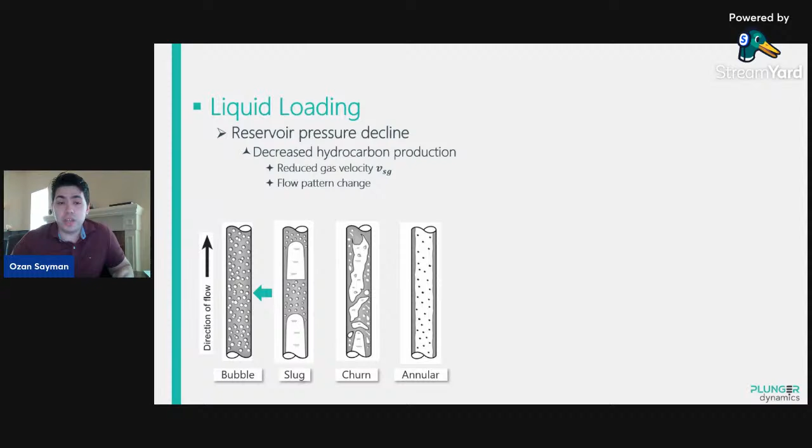So let's talk about liquid loading. As reservoir pressure declines, your hydrocarbon production is going to decline. The gas velocity is going to be reduced over time, and your flow pattern is going to change from annular flow to churn flow and then slug flow, and you're going to see liquid loading.

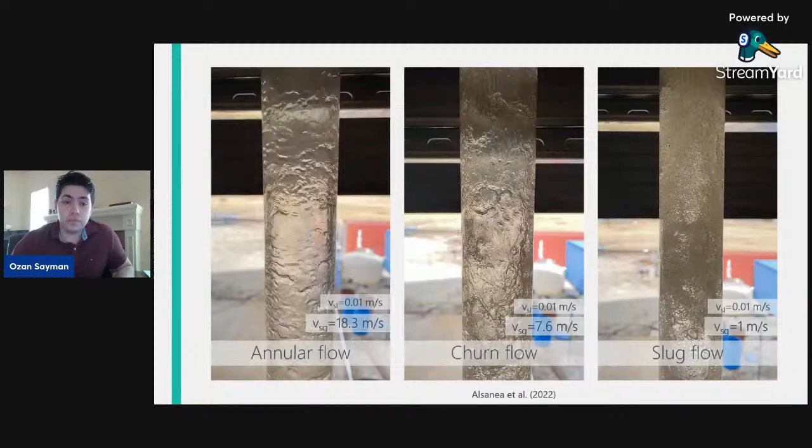Let's describe the flow patterns with different videos. So on the left, you have annular flow. You can see this is a high gas velocity situation with 18.3 meters per second of superficial gas velocity. In this case, you can see the film going up, and in the core of the flow, the gas and some liquid droplets going up.

In the next one, you can see a churn flow example. In this example, you can see the liquid film - some parts of the liquid film are falling and some parts are going up. There's a stagnant liquid film, and this is called churn flow.

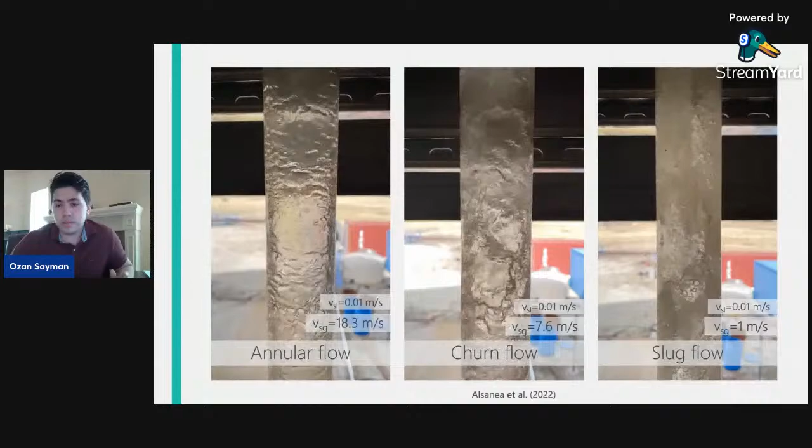At a reduced superficial gas velocity of 1 meter per second, we are going to observe slug flow. This is shown in the right video. As you can see, the slug is going to go up, but as slugs pass, then the liquid film is going to fall down.

So as reservoir inflow decreases, the production is eventually going to die because liquid loading is going to occur. So the flow pattern is going to change, and then you're going to see the slug flow, and the loading is going to kill the production.

Basically, liquid loading is happening due to insufficient gas velocity. The gas is not enough to basically have the liquid droplets going up.

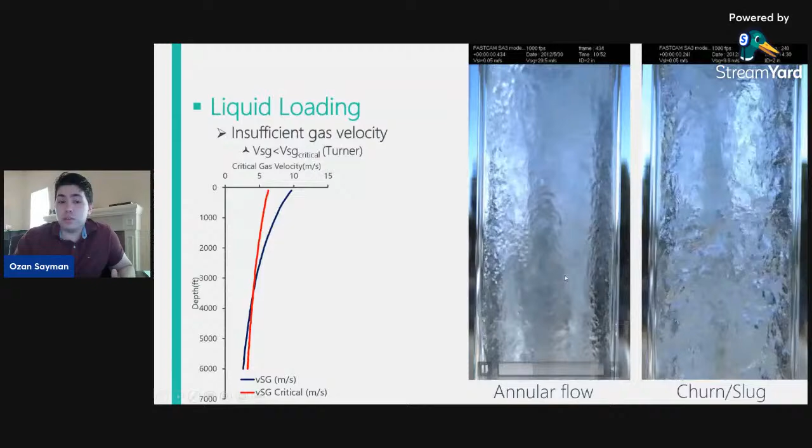But in the bottom parts, this gas velocity declines. So instead of annular flow, you probably see churn or slug flow, and the liquid loading starts to occur here. So how to avoid this? There's artificial lift methods. You can use different pumps, which can increase your reservoir inflow and production rates, or you can try to reduce hydrostatic pressure. Plunger lift, gas lift, and foam lift are good examples for that.

Let's talk about where liquid loading happens. Liquid loading is known to be happening in gas wells, but it's also happening in unconventional plays. So this is not related to just gas wells. There could be wells producing high amounts of oil and still having liquid loading issues.

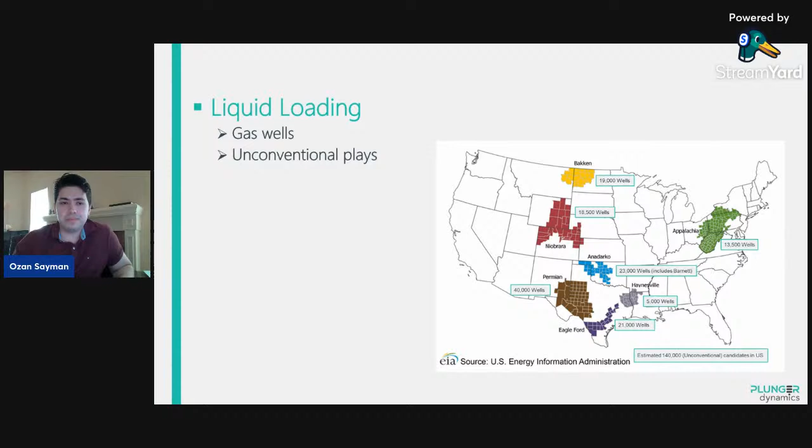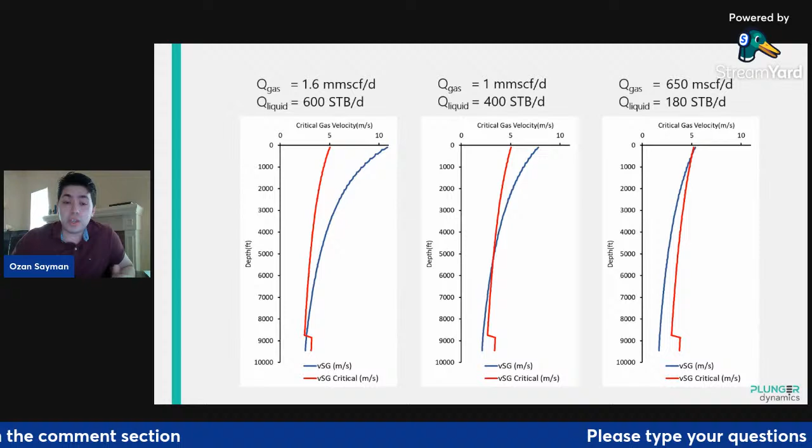So I did 3 different multi-phase flow simulations. This is a well schematic and fluid properties taken from the Midland Basin. For 3 different production rates, I plotted how critical gas velocity and actual gas velocity in the well behave. The actual gas velocity is the dark blue one. At 1.6 million cubic feet, we don't expect liquid loading. However, as we go to lower production rates, you might be producing 400 barrels of water and oil and 1 million cubic feet of gas. At some point, we start to have a liquid loading issue.

As you go to reduced gas production rates, you are going to have more and more severe liquid loading cases. So in those cases, you either need some gas lift to increase the gas velocity, or you need to use plunger lift. So this is not actually just for gas wells. It's also happening for wells producing more oil and more water than a typical gas well.

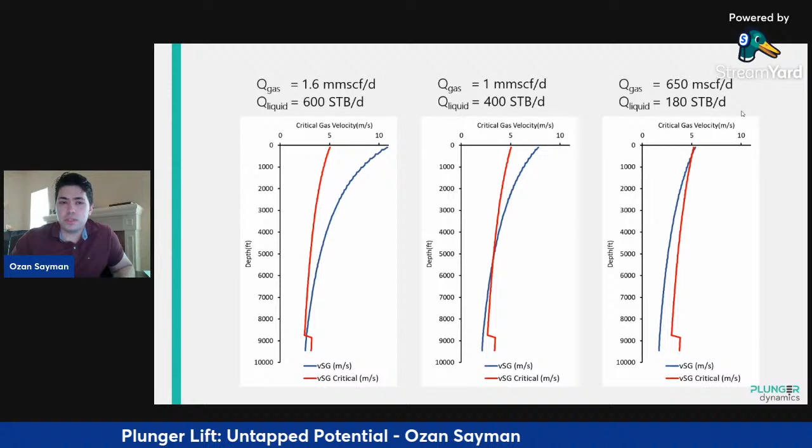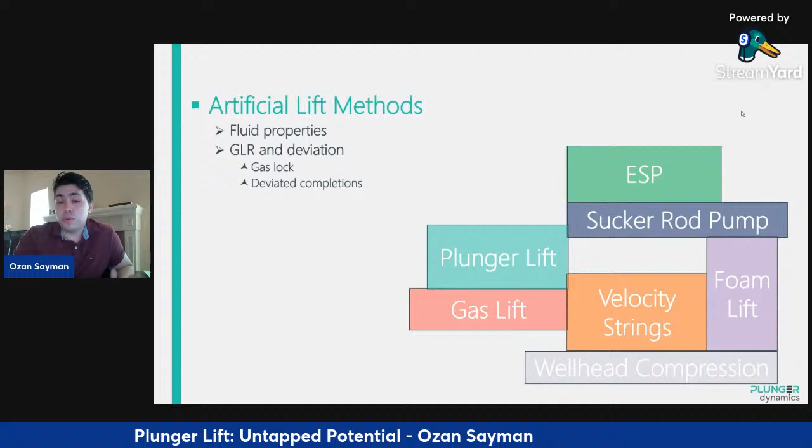Let's look at some of the major artificial lift methods, and which is going to be a solution for liquid loading. For fluid properties happening in unconventional plays and gas wells, the PCP and jet pump are not the best options. For higher gas-liquid ratios, gas lock can happen. For deviated completions, you might not be able to use sucker rod pumps and ESPs. Moreover, some methods like foam lift and velocity strings only work for short periods. Foam lift is basically dependent on the chemical composition, so they are also not the best options for wells having liquid loading issues.

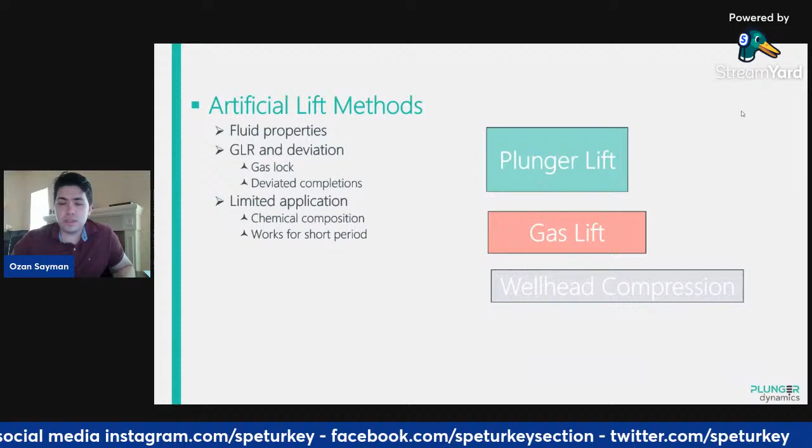So plunger lift, gas lift, and wellhead compression are the best options to tackle the liquid loading problem. We are going to focus on plunger lift. In the unconventional plays, it typically starts to be deployed after 6 months. In some cases, they just start with plunger and gas lift together from day one.

With plunger lift, you can increase your production rate. You can help mitigate paraffin issues, and you can cut lift expenditure. Instead of injecting more gas, you can inject less gas, maybe you can remove the compressor. So it's a much more cost-effective method compared to others.

Let's look at a typical gas production decline curve. Let's say this is a gas well and it's declining, shown by this decline curve. With liquid loading starting, we are going to see erratic production, and the average production per day is going to reduce, and you're not going to be able to continue with the gas well decline curve.

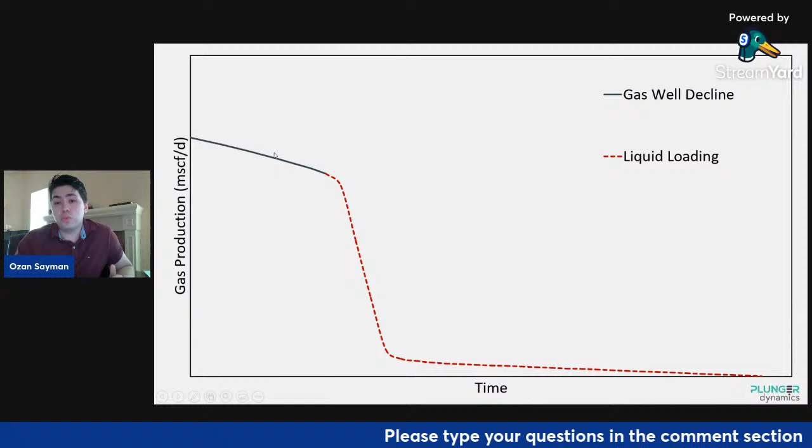However, if you install a plunger here, you are going to tackle the liquid loading problem, and you are going to be able to have a similar decline curve to what you expected before the liquid loading stage. So between that is your cumulative production increase due to plunger lift.

Okay, let's talk about how plunger lift works. What is a plunger? A plunger is basically a metal cylinder. We are creating a sealing between the gas and liquid phases in the well. With this metal cylinder, we are just using the reservoir energy.

I'll start with the conventional plunger lift, which is a type of intermittent production. In this case, we start with our well shut in. Let's check the animation. Our well is shut in, and there is no production right now.

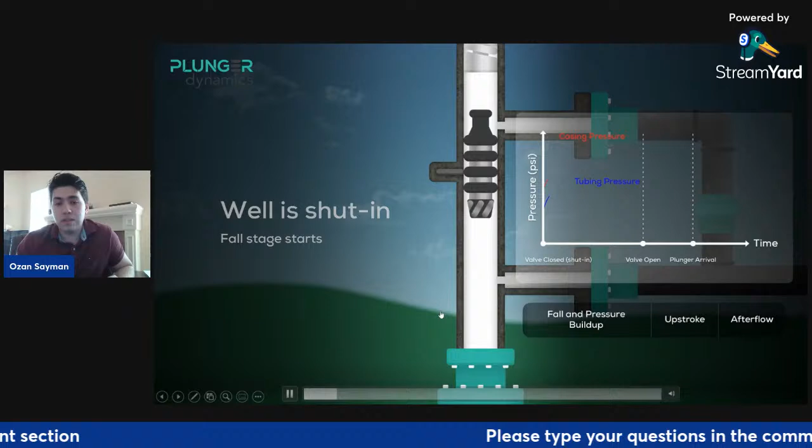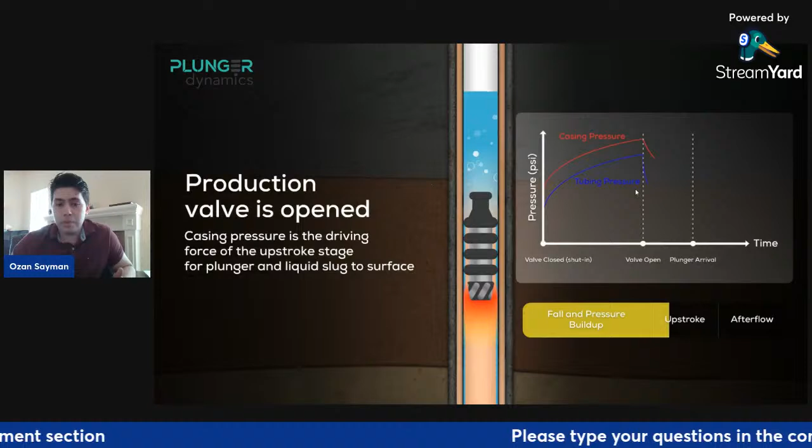The plunger falls against the static gas and liquid column. Pressure builds up because we shut our well in. Then as we open the production valve, the plunger goes up and removes the liquid loading that happened in the bottom hole parts. With that travel, with that cycle, we're able to remove that liquid loading. Doing these cycles continuously helps us get all that liquid loading out, and our production doesn't die, because we're removing hydrostatic pressure with each plunger cycle.

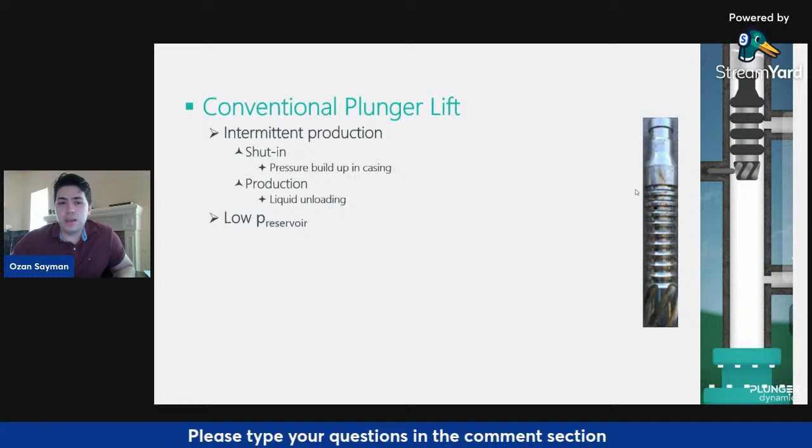So basically, this is an intermittent production method. When we shut the well in, we build up pressure in the casing. When we open the production valve, we unload the liquid. This method is typically used for marginal wells, when the reservoir pressure declines a lot, when you need very high gas injection rates. Instead of that, you go for the conventional plunger lift, and you're able to unload that liquid accumulated in the bottom hole. We have 3 stages in this.

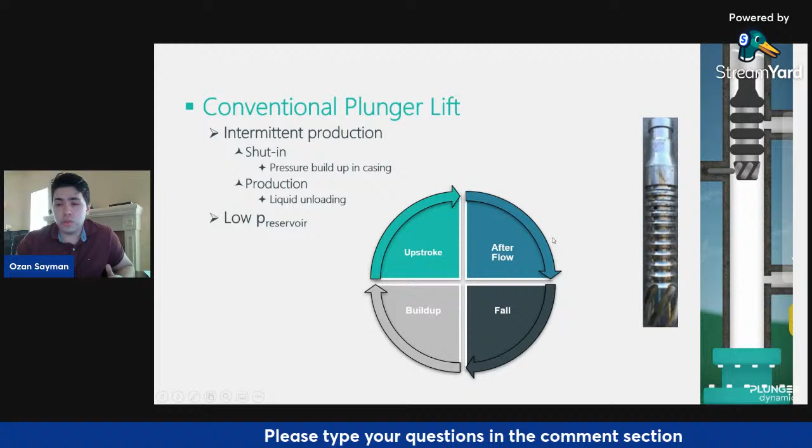When we shut the well, the plunger falls and pressure builds up. As we open the production valve, the plunger upstroke happens - this is the upstroke stage. Then we produce this liquid load, and at this stage we leave our plunger at the top in the lubricator. This stage is called afterflow, so we let the well produce by itself until the liquid loading starts again.

In the plunger lift area, there are poor optimization techniques used. Most people use rules of thumb - there's not too much physics put into these plunger lift operations, which well to use, or plunger type selection. So we are trying to eliminate that with our research and other works on plunger dynamics.

Let's move on to continuous flow plunger lift. This is a different method - we don't need to shut the well in. This method has little to no shut-in time. Shut-in times could be just 1 minute to let the plunger fall from the lubricator, but in general you can consider this continuous production without any shut-in time. We have 2 different continuous flow plunger lift types: bypass plunger and 2-piece plungers.

This is an example of a 2-piece plunger. We have a sleeve - basically a hollow metal cylinder, the inside is empty - and we have a ball. We let the ball fall first, and then we let the sleeve fall on top of it. When they merge together at the bottom hole, they go up together and sweep the liquid.

This is my experimental facility from University of Tulsa. Here we were able to have multiphase flow conditions. We have the liquid phase shown with red dye color, and we also have gas injection in this case. Let's start the video.

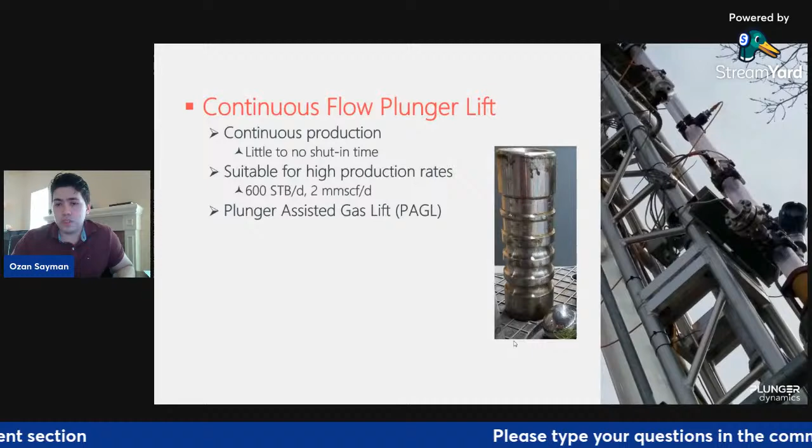In the start of the video, we have the ball in the bottom part, and the sleeve is going to fall. You can see the churning flow. The sleeve is falling, and it merges with the ball and goes up, sweeping the liquid, basically reducing the hydrostatic pressure in the well. This method is suitable for high production rates - it can go up to 600 barrels per day and 2 million cubic feet of gas. When used with gas injection, this is called plunger assisted gas lift, PAGL.

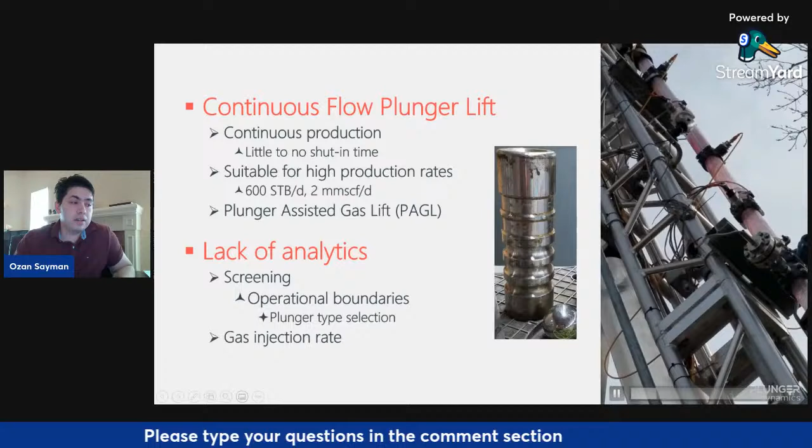We have only 2 stages in this case - the fall and the upstroke. We still have a lack of analytics happening for this. The screening of which wells to use this method on is not great. In terms of operational boundaries and plunger type selection, there is room to grow, and operators are always looking to optimize the gas injection rates on those plunger assisted gas lift applications.

Continuous flow is basically continuous production, but conventional plunger lift is an intermittent production type. You might be shutting your wells in for hours, then sending the plunger up and producing that liquid, with an afterflow time of maybe 10 or 20 minutes. Basically this is intermittent production - you are not going to have production on time all day.

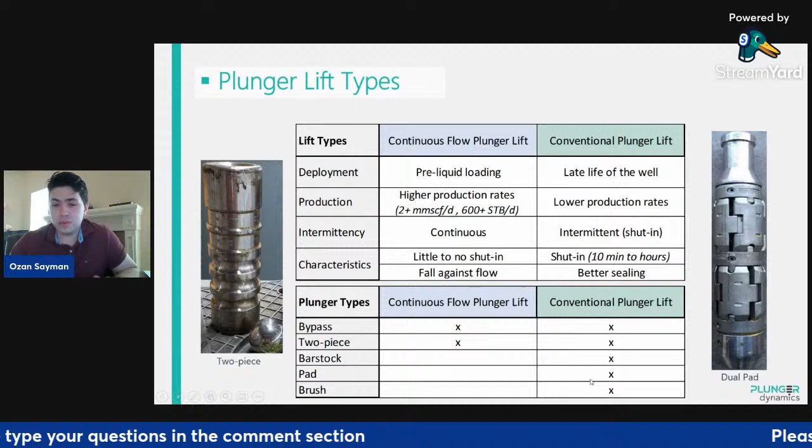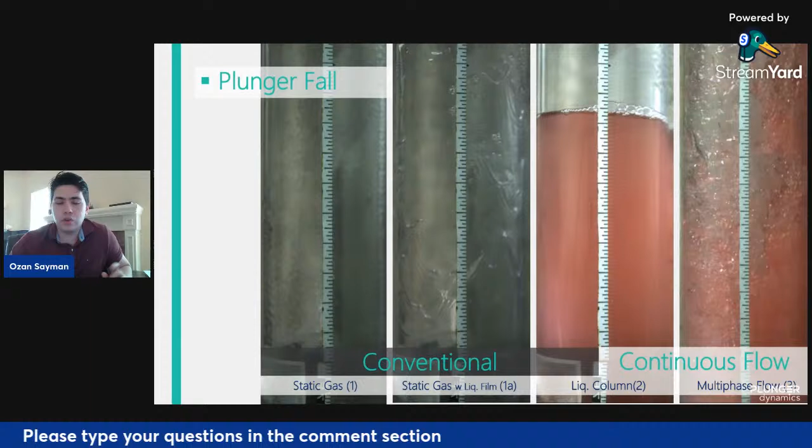So conventional plungers fall against basically static gas or a static liquid column. In the liquid column, its fall velocity is reduced a lot more. The continuous flow plunger basically falls against multiphase flow. On the right, you can see the multiphase flow environment - there's two-phase flow here, and the sleeve, the hollow cylinder, is falling against the multiphase flow.

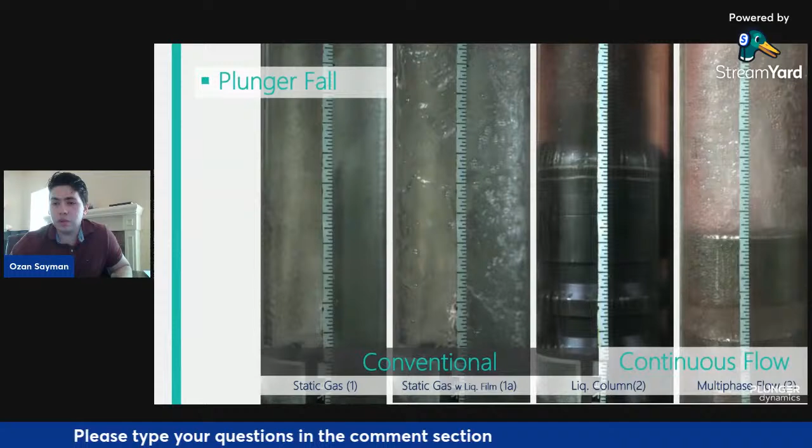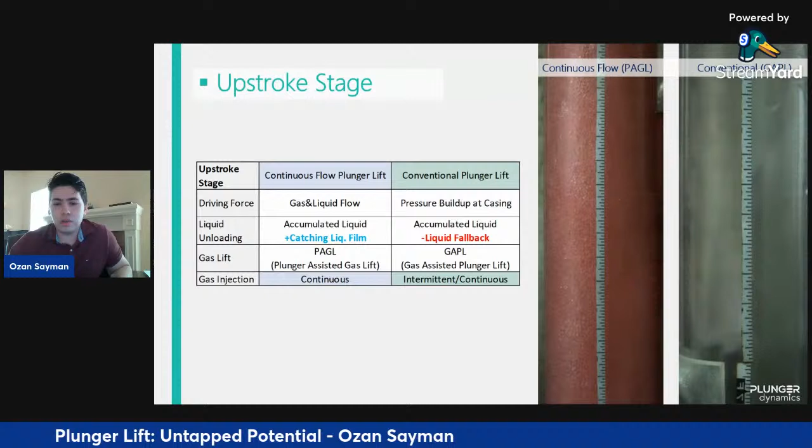Let's compare the upstroke stage. In the upstroke stage, continuous flow plunger lift relies on the gas and liquid flow. The gas and liquid flow itself creates a drag force, and the drag force carries the plunger weight and the slug weight. You can see the liquid slug is coming up - this is on top of the plunger, this is aerated liquid slug. Next you'll see how the plunger sweeps the liquid from the tubing.

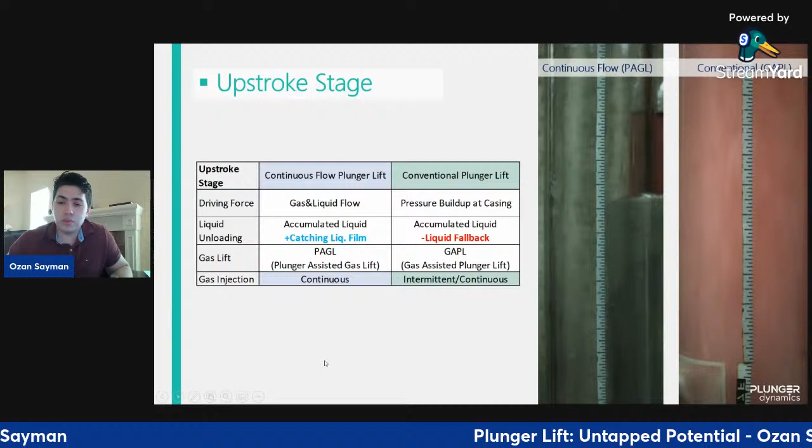As the plunger goes up in this case, it accumulates the liquid slug on top of it. Now let's compare this with the conventional plunger. The conventional plunger starts at the bottom, and all the liquid loading, all the liquid slug, is accumulated on top of it, and it's going to start with those conditions. So the liquid slug is coming, and the conventional plunger is going to come up, and it's going to have a liquid fallback - some residual film is left out after the plunger comes.

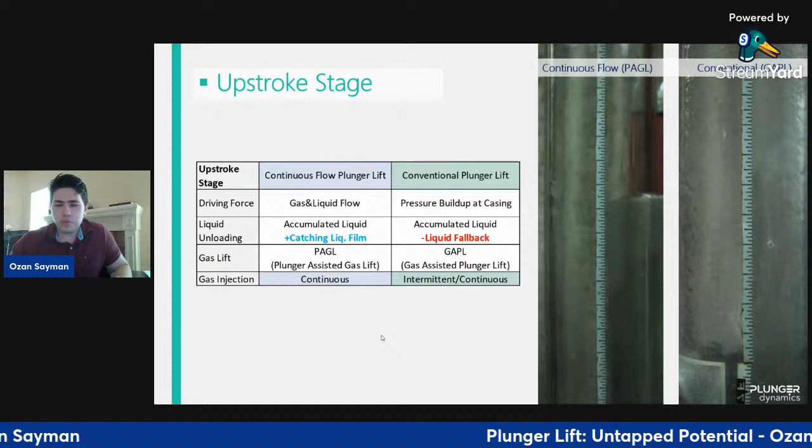So in the continuous flow plunger lift case, if you couple this with gas lift, this is called plunger assisted gas lift, PAGL. And for conventional plunger lift, if you are doing intermittent production with a shut-in time, this is called gas assisted plunger lift, GAPL. Those terms are usually confused, but this is how we define them at the University of Tulsa.

So let's talk about gas lift methods - how gas lift works. In a well, when we inject gas, we reduce the liquid holdup. Reducing the liquid holdup helps reduce gravitational pressure loss. When we inject gas, we are also increasing the frictional pressure loss, which also increases the compressor costs and emissions for our case.

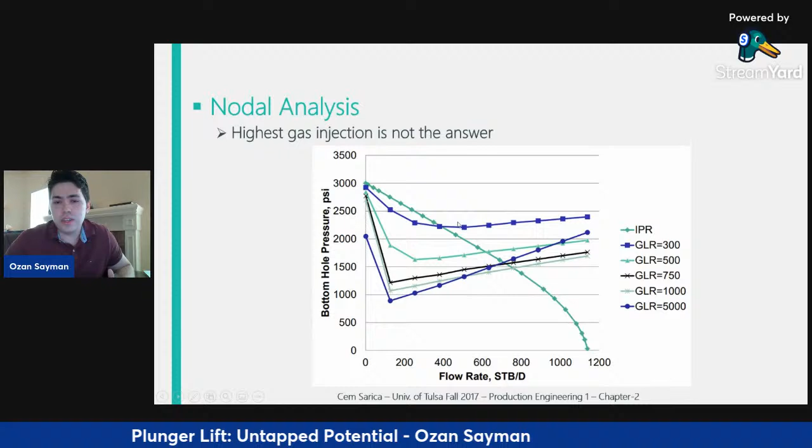You can see this is the 300 MCF per barrel GLR rate, and this is a higher bottom hole pressure. So in this case, we are going to produce less. But if we inject more, then we can lower the bottom hole pressure and we can increase our flow rate.

But this doesn't mean highest gas injection is the answer every time. At some point, frictional pressure loss is going to be dominant, and as we inject more gas, we're going to see our bottom hole pressure actually start to go up.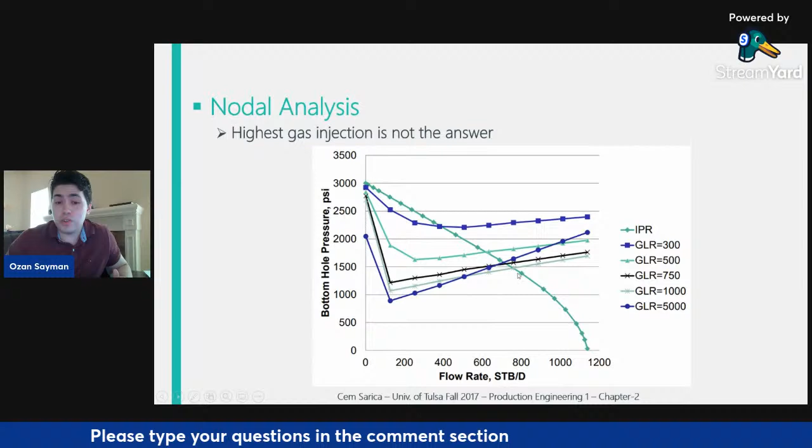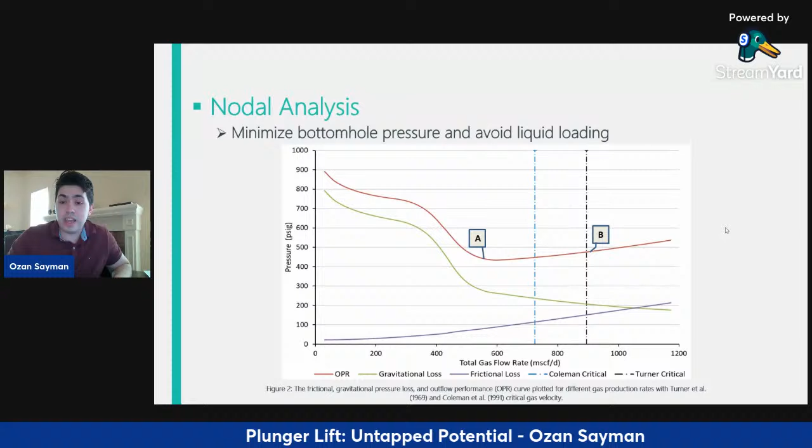You can even maybe remove the whole compressor. Basically, it helps you avoid liquid loading and minimize the bottom hole pressure compared to gas lift.

Let's also talk about intermittent gas lift and what happens with and without a plunger. So when your production rate declines, when your reservoir pressure declines, you can always have intermittent gas lift. Let's say your well is liquid loaded and you cannot produce anything. You can shut your well, build up pressure in the casing, and try to shoot that liquid accumulated in the bottom hole with the casing pressure.

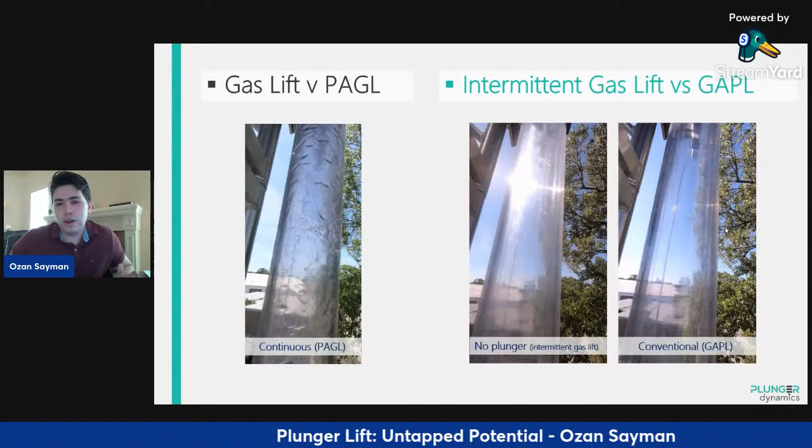So as you can see, when we try to do that without a plunger, the gas is going to go from inside of the slug and it's going to escape, and we are going to lose most of the liquid. We are not going to be able to produce most of the liquid with intermittent gas lift.

But with the same method, if you used plungers, if you put this metal cylinder as a seal, you are going to see most of the liquid is going to go up.

So let me replay those things. In this case, you are losing most of the liquid with intermittent gas lift without a plunger. But in this case, with the plunger, you are basically producing most of the liquid.

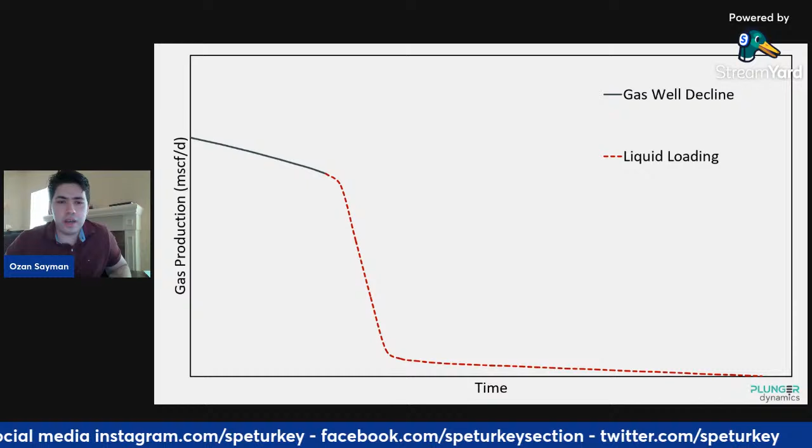So let's go on the operational boundaries of when to start the different methods - gas lift, plunger lift - in a typical decline curve I showed earlier. We talked about how plunger lift helps to produce this amount when you avoid liquid loading.

Even before liquid loading, we can have maybe gas lift or just natural flow, but there would be stagnant film, still higher hydrostatic pressure. With gas lift and plunger lift, we can reduce that.

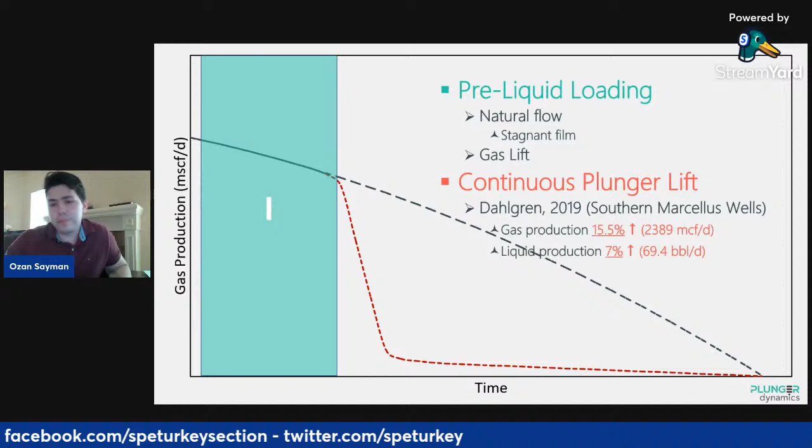With plunger lift, there's a case David Dahlgren showed in the ALRDC workshop earlier. Before the liquid loading stage, he applied continuous flow plungers, and it showed production increasing up to 16%, and liquid production increasing up to 7%.

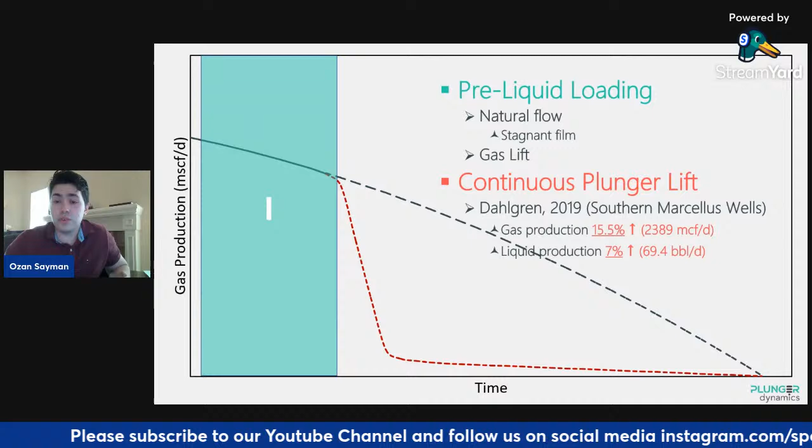As we get into the liquid loading region, there are options to use - intermittent production or gas lift, but you would need to inject higher and higher gas, which means higher costs. Instead, you can use continuous flow plungers.

With continuous flow plungers, Polasek in 2013 in the Barnett showed they were able to remove the compressor - they removed the gas lift altogether and just put continuous flow plungers. Their production didn't decline at all; it actually increased marginally, but they were able to basically remove the compressor.

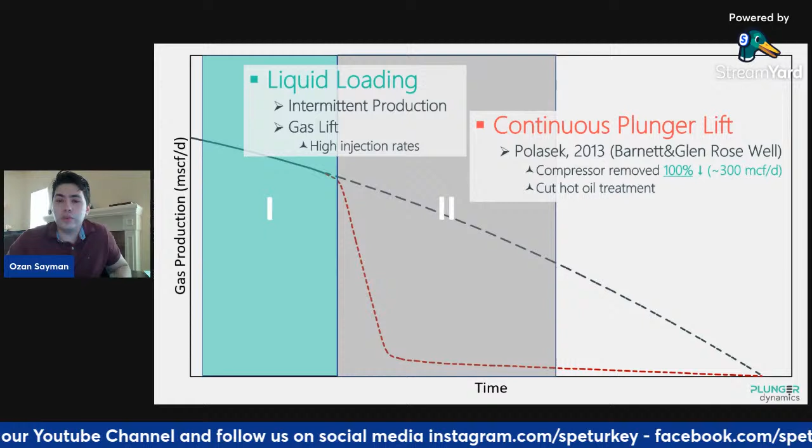This is a huge cost saving for them. They were doing hot oil treatment against paraffin deposition, but with each plunger cycle, they no longer needed to use hot oil treatment against paraffins or scale buildup.

Another case is using the plunger with gas lift. Maggie Burns from X2 Energy presented this paper showing plunger-assisted gas lift cases. They had this well with continuous gas injection, but with time, since the reservoir declines and the gas flow rate coming out from the reservoir declines, they needed to inject more and more gas.

So they applied the plunger in it - they put continuous flow plungers in it, and they were able to reduce the gas injection by up to 80%. They also saw the gas production increase.

Removing the compressor, it's easy to understand that you're going to cut costs, but reducing gas injection can mean the same thing as well, because when you reduce gas injection on a well pad, you can actually direct that gas to different wells where it's more feasible to use.

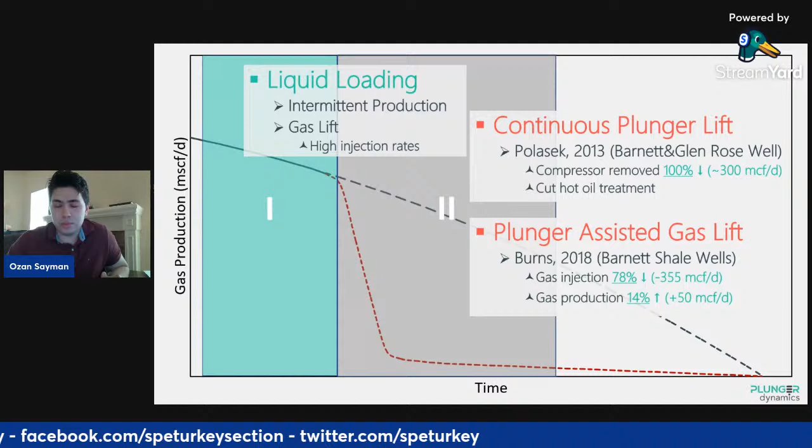In the later stage of the well, when reservoir pressure declines more and production becomes marginalized, you can use intermittent production or plunger lift. This is one of the studies from EPA - they show conventional plungers on average increasing gas production by 54%.

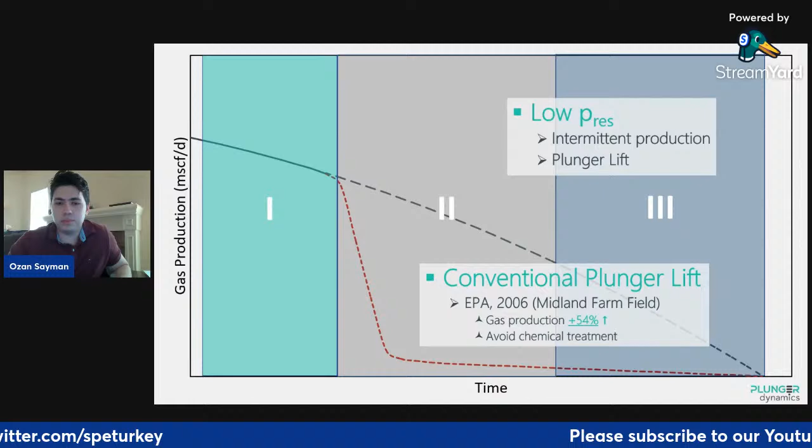It's basically reducing emissions and helps avoid chemical treatment. So to sum up the two methods: with continuous flow plunger lift, you can increase your production, and at the same time cut costs. You can have lower lease operating expense.

You can reduce gas injection and chemical treatment. On the conventional plunger lift side, it helps extend the life of the well. The well production might already be dead because of liquid loading, but if you put the conventional plunger, you're going to see substantial cumulative production increase, and it helps postpone plug and abandonment of a well.

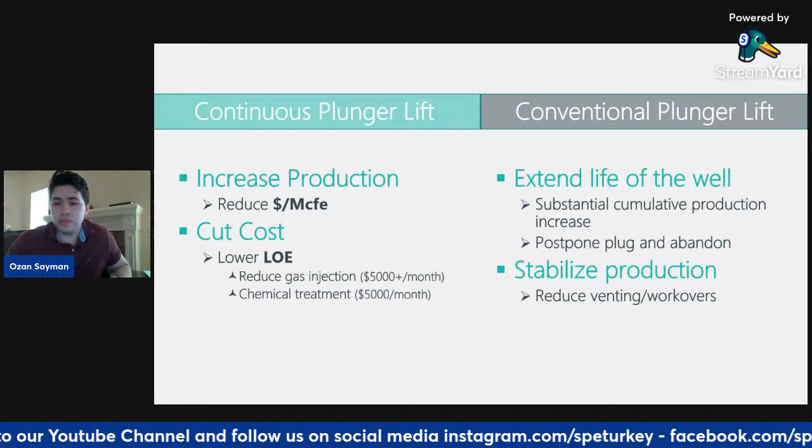It helps stabilize the production and reduces venting, reducing emissions. The whole plunger lift method is a low capital investment method - you can install it with wireline installation. It costs less than, say, gas lift, ESP, or sucker rod pump investment.

The operating expense is also very low. This only uses the reservoir's own energy - you don't need to spend any gas to run a compressor. It uses the well's own energy, and operating expense is usually just changing some plungers. In most cases you don't need to inject chemicals or hot oil treatments against scale buildup, so operating expense is minimized with plunger lift.

It's suitable for unconventional reservoirs, gas wells, and there are many candidate wells. It's very popularly used in North American fields, and I believe there's more and more potential, but most operators around the world don't know how or which wells to use it on. So we are trying to help understand where to use plunger lift.

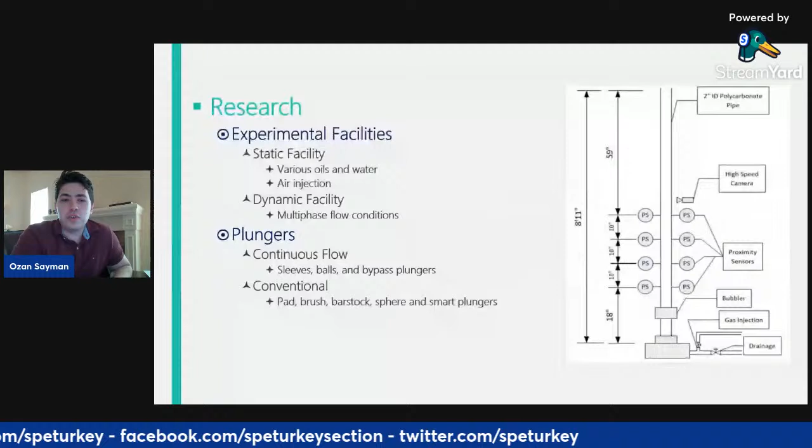Okay, let's move to the research. I'll briefly summarize some of my work with the University of Tulsa. We had two different experimental facilities - a static facility with a 9 feet long, 2-inch ID pipe.

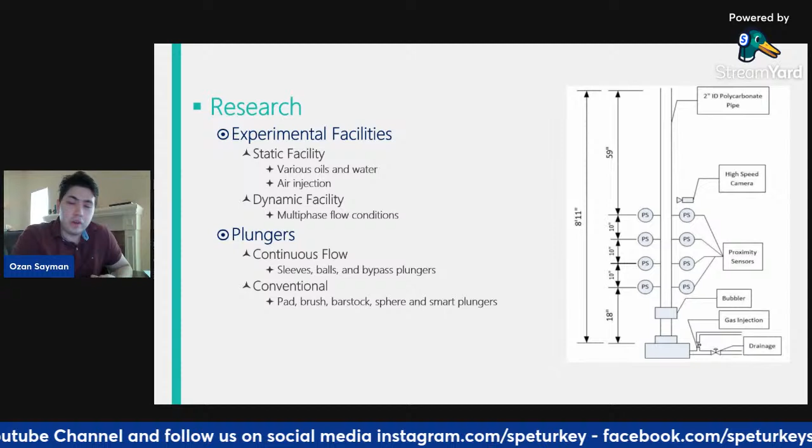We basically put different liquids in it, injected air, and had proximity sensors to study the plunger fall in this case. Then we went to the dynamic facility, where we were able to have multiphase flow conditions, and we ran tests in that facility as well.

At the University of Tulsa, we had tests on continuous flow plungers, sleeves, balls, and bypass plungers. On the conventional plunger lift side, some of my colleagues worked on pad, brush, and bar stock plungers, and we also had in-house built smart plungers.

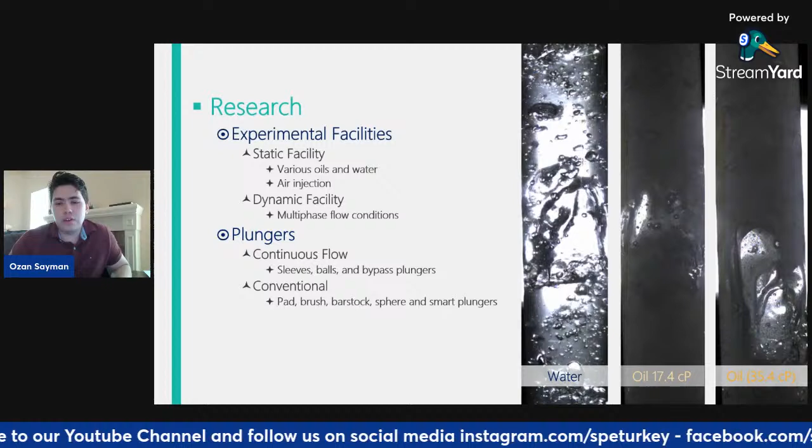So these are some of the videos from the static facility. You can see a sleeve falling against different flows, different liquids. We used water and different mineral oil with different viscosity and densities.

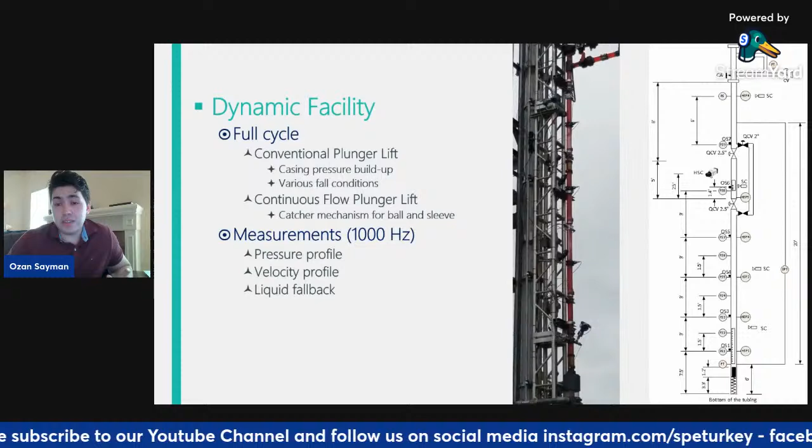But this is our dynamic facility. In the dynamic facility, we were able to do conventional plunger lift experiments. We have a casing section here. We basically build up pressure in the casing, and then we open the production valve, and we are shooting our plunger up with that casing pressure. And we can have various fall conditions to test conventional plunger lift.

Same applies for continuous flow plunger lift. In the continuous flow plunger lift, we don't need to build up pressure in the casing. We are basically injecting gas and liquids continuously, and the plunger goes up with the drag, and it also falls against flow. We had different measurement methods here.

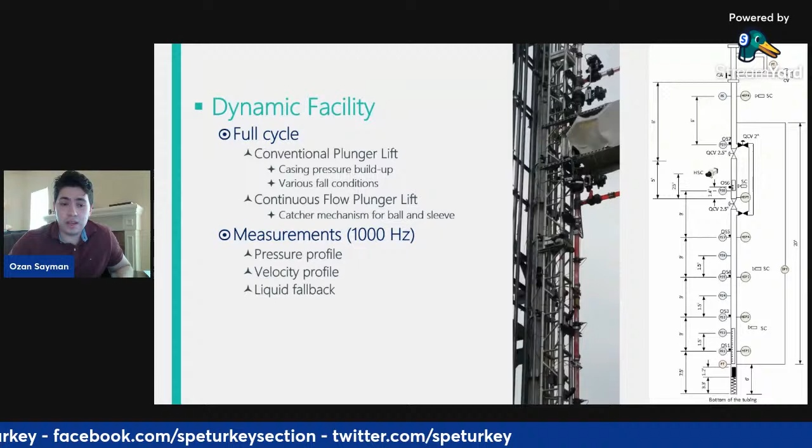We had pressure sensors, DP sensors. We were able to get a velocity profile with proximity sensors and optical sensors, and we were able to quantify liquid fallback with our quick closing valves, trapping the multiphase flow or trapping the fluid liquid falling back from the plungers.

So let's look at the plunger fall velocity experimental results. On the left, you can see some of our plunger fall velocity results, but we have the sleeve results and ball results here in different mediums like water and different mineral oils.

However, the fall velocity comparison is not applicable to field with just giving fall velocity out. We needed to get dimensionless parameters. So dimensionless parameters help us characterize the fall mechanics. For every unique shape, every unique geometry, there is only one corresponding drag coefficient for each Reynolds number.

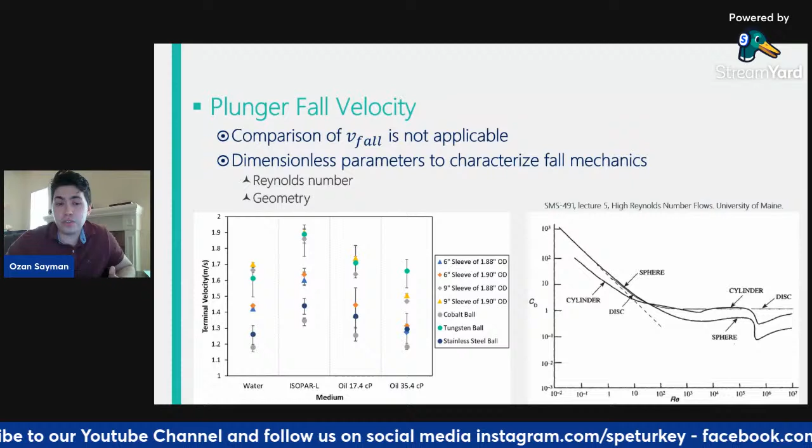In the right plot, you can see sphere, cylinder, and disc, and they have only one drag coefficient for a given Reynolds number. So for each different shape, if you get the drag coefficient to Reynolds number relation, then you can apply this in the field because it's a dimensionless parameter. You can basically scale this up.

So with this idea, we basically tested our plungers. We get the fall velocities. Here, you can see our force balance and how we get the drag coefficients out of our fall velocity experiments. We basically have a force balance here.

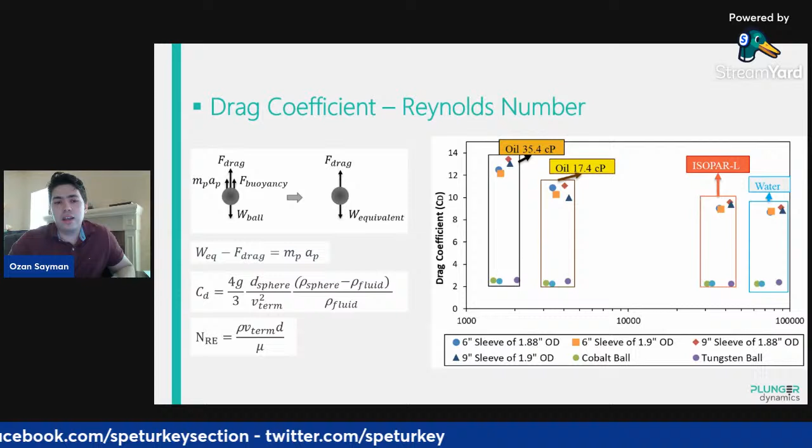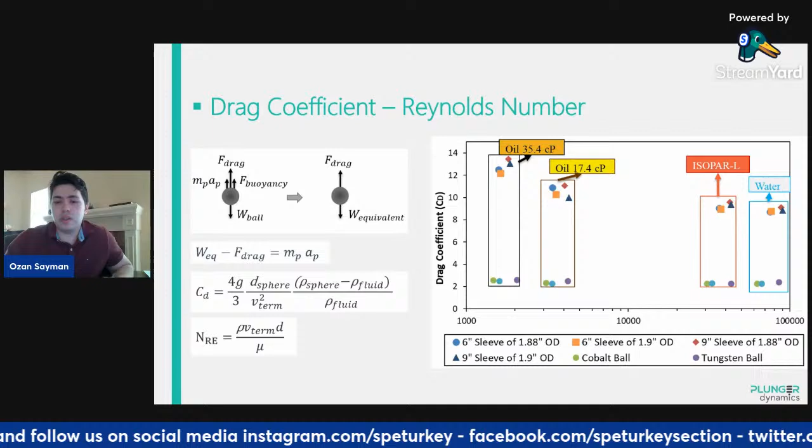At one point, we expect the plungers to reach the terminal velocity where they don't basically accelerate or decelerate. When they are at the same velocity, the terminal fall velocity, we are able to get the drag coefficient. You can see different sleeves and different balls and their drag coefficient. We were basically able to test in different fluids to have different Reynolds numbers, and then we were able to get this correlation out of these experiments.

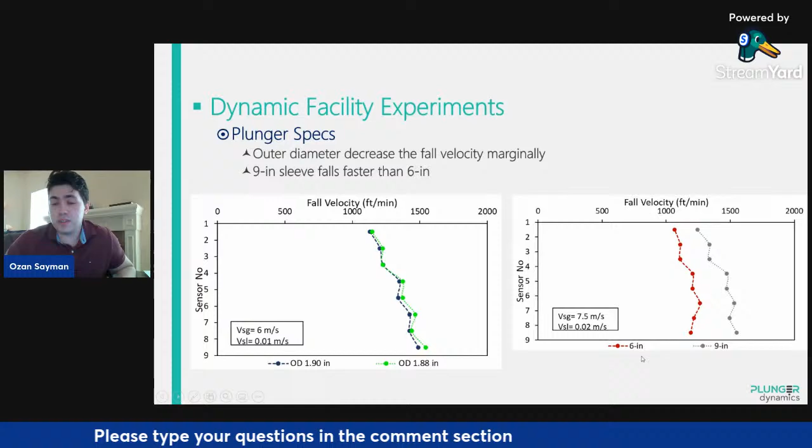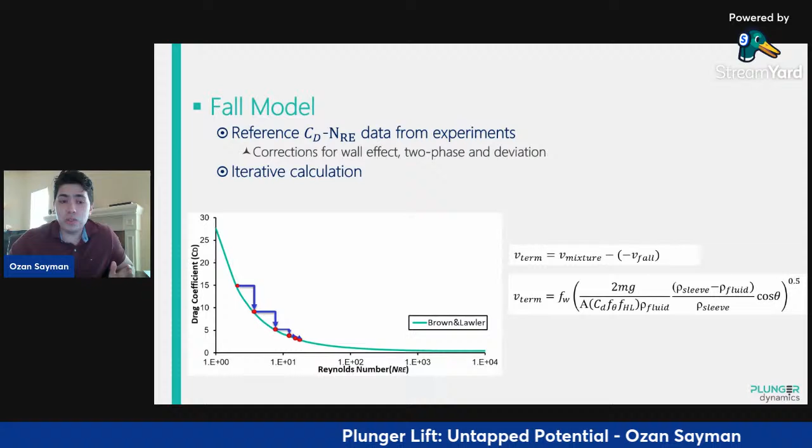So we built a fall model. We built a mechanistic model. We used our reference drag coefficient to Reynolds number data from our experiments. We had corrections for wall effect, two-phase flow, and deviation. Basically, our model does an iterative calculation to find the drag coefficient point for the given Reynolds number.

With this fall model, we just need the plunger's drag coefficient. For different shapes, this drag coefficient is going to change, but you can get this drag coefficient relation with experimental tests, or maybe field measurements with smart plungers. Perhaps you can use computational fluid dynamics for this, but you just need to get these dimensionless parameters of drag coefficient. After that, the fall model can apply to every different parameter that happens in the well.

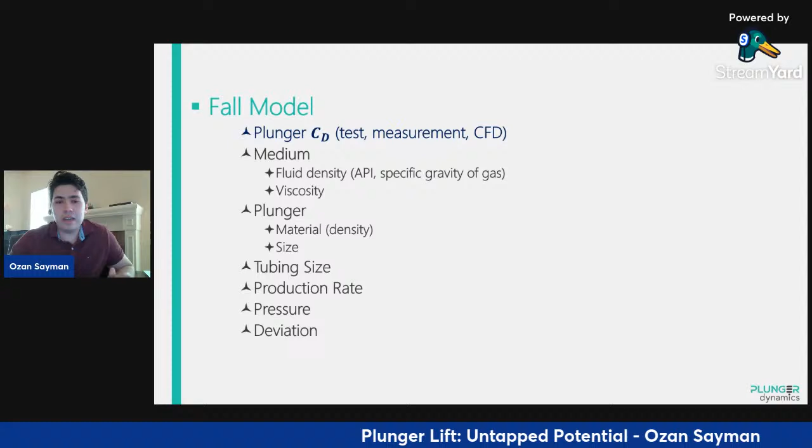You can use different fluid densities, different API gravities, different specific gravity of the gas. Basically, you can use different plungers. If you know the density, weight of the plunger, or size of the plunger, you can apply that in the fall model. The tubing size, production rate, pressure, the deviation angle - it can all be applied. We just need to have the reference drag coefficient to be able to estimate fall velocity with our mechanistic model.

Let's move on to the upstroke stage - how continuous flow plunger upstroke happens. This is operated with little to no shut-in. You can see forces applying on a plunger in the right side. Basically, our plunger needs to carry its own weight, and it needs to carry the liquid slug on top of it. The driving force of the plunger is the drag force because of the gas and liquid velocity.

In the conventional plunger lift case, you are building up pressure in the casing when you shut the well in, and its driving force is that casing pressure, the difference from the line pressure. However, in the continuous flow plunger lift case, we are relying on the drag force. For this, we also use the drag coefficient. I denoted this as CD high, which means for merged two-piece plunger or closed bypass plunger for the upstroke.

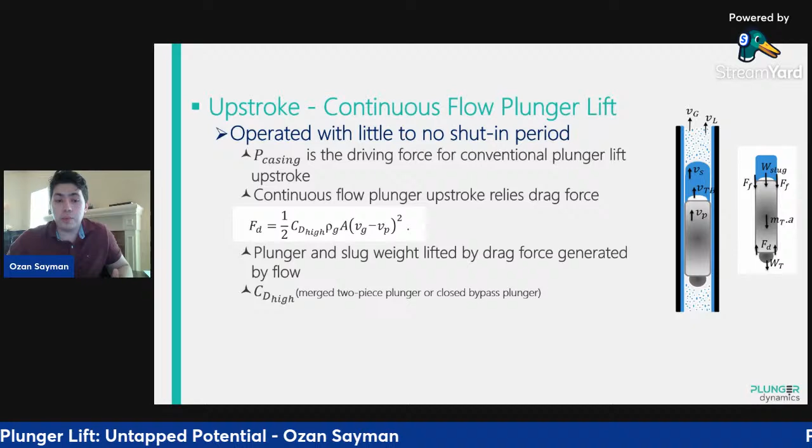Before starting the experiments, the general idea about those continuous flow plungers - we weren't shutting the well in, but the idea was the plunger is going to go down, fall to the bottom of the assembly, and wait there to build up some pressure to be able to go up. But in our experiments, what we saw was instantaneous upstroke. There was no wait time. It goes up immediately because of the drag force.

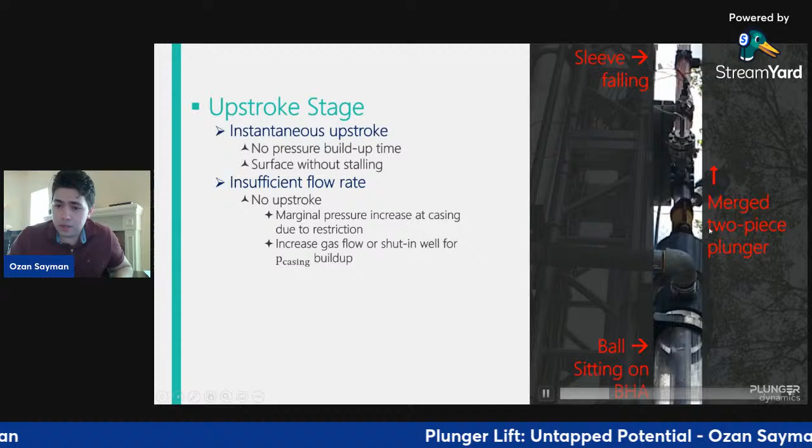Let's check the video here. Our ball is sitting in the bumper spring, and the sleeve is going to fall from here. This is a video I took with my phone. You can see the sleeve merging here, and then it immediately goes up. It's, of course, a slow motion video. So there is no pressure build-up time required for this case.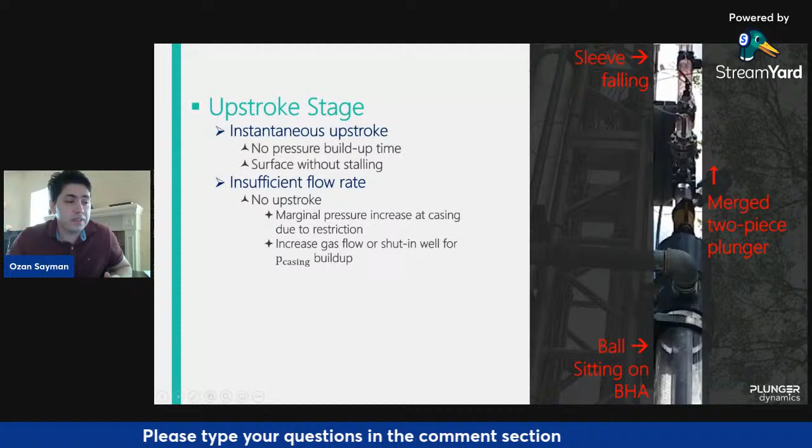So what we saw in the experiments was plungers always surfacing without stalling. If it starts to go up, it'll go up all the way because pressure is getting reduced in the upper parts. The gas is going to expand more. And if it starts to go up at the bumper spring location, then it's going to go up all the way.

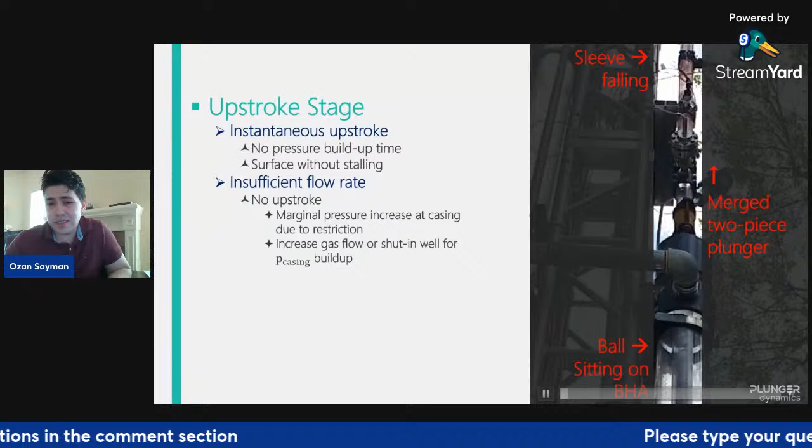What we saw when it wasn't going up was for insufficient flow rates. If we reduce the gas flow rate lower and lower, we see no upstroke. What we see is there is no pressure buildup when the plunger is sitting in the bottom hole. It just creates a marginal pressure increase at the casing due to the restriction. But you cannot send your plunger up without increasing the gas flow rate, or you just need to shut your well and build casing pressure to shoot your continuous flow plunger up in this case.

So we also had a mechanistic model for the upstroke stage. We basically coupled them together for plunger-assisted gas lift, which we call PAGL. In the PAGL model, we have continuous flow plunger lift hydrodynamics.

What we need first is the multiphase flow. We need to understand the multiphase flow in different parts of the tubing to be able to run our mechanistic models on plungers. So we need the plunger specs and the plunger's drag coefficient.

In the fall stage, the model utilized dimensionless parameters we got from our experiments. In the upstroke, we use a drag-based method, which is showing fair match in the field trials. We are able to estimate the plunger velocity and how much liquid slug we are going to remove from the well. This mechanistic model helps us build the operational boundary for PAGL and for different plungers.

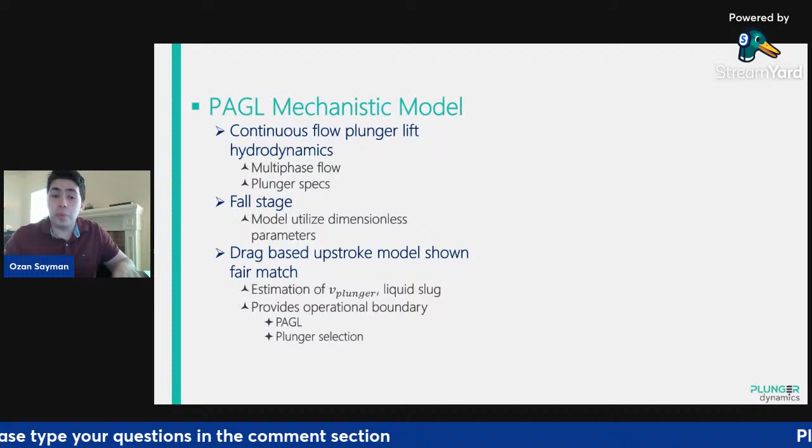To explain this on the flow pattern map: at higher gas flow rates, on the right side, you're going to have a boundary for fall. At higher gas flow rates, you're not going to be able to fall your plunger. If this is a two-piece plunger, your tungsten ball is going to be the fastest falling ball, but at some point it's not going to be able to fall. So the plunger is only applicable at gas velocities less than that operational boundary.

On the left side, we have a lower boundary, meaning this is the smallest gas flow rate required to shoot your plunger up. So between that, we can call this the operational area. With our tools, we are also able to define the effective area - where should you use the plunger lift.

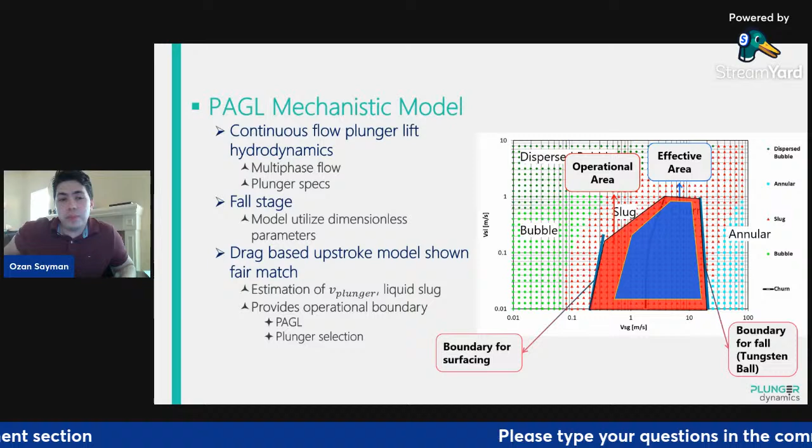With the mechanistic models, we got a fall model. We are doing multiphase flow simulation, which is highly influential on fall velocity. We are able to get the pressure and mixture velocity profile for the multiphase flow, then we are able to run our plunger models.

We have all the plunger types, all the different materials, different plunger heights and ODs. These are all applicable for different tubing sizes, and we are able to get accurate fall velocity - that's our objective.

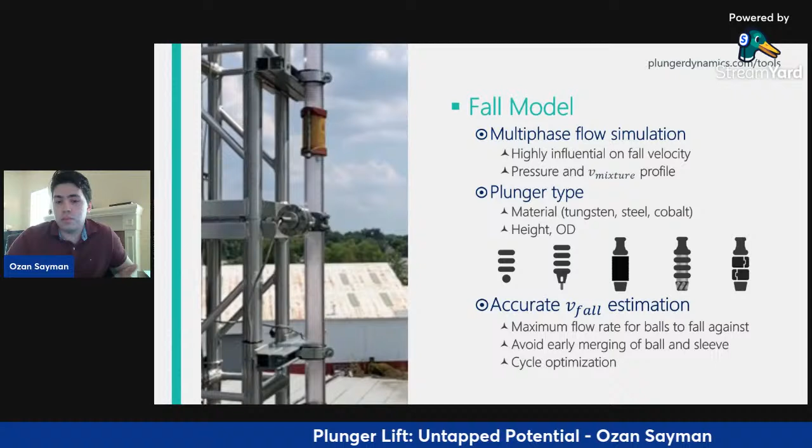One important thing is basically estimating the maximum flow rate for balls to fall against, to understand when we can deploy plungers. Another thing could be avoiding early merging of ball and sleeve.

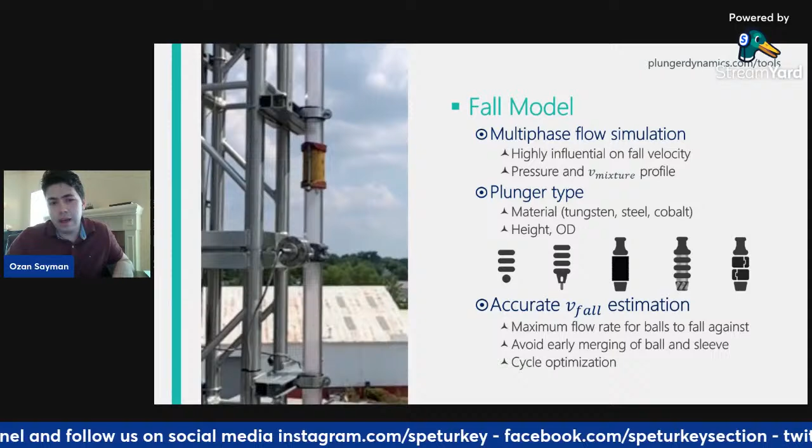In the video on the left, you can see the ball is falling, but since the sleeve is falling faster, it's going to catch the ball along the way. So it's catching the ball, and they're going to go up together. We don't want that. We want the ball to reach the bottom hole assembly, the bumper spring, and then have the sleeve merge with the ball at that location. Because if it does a partial trip like this, we are not going to be able to remove the liquid loading in the bottom parts.

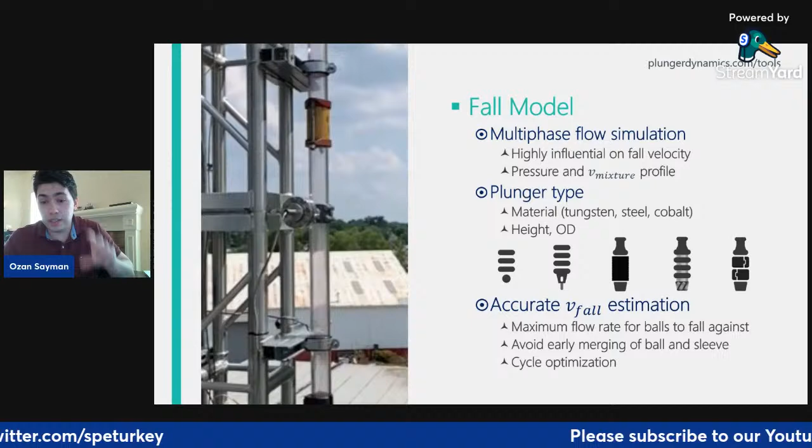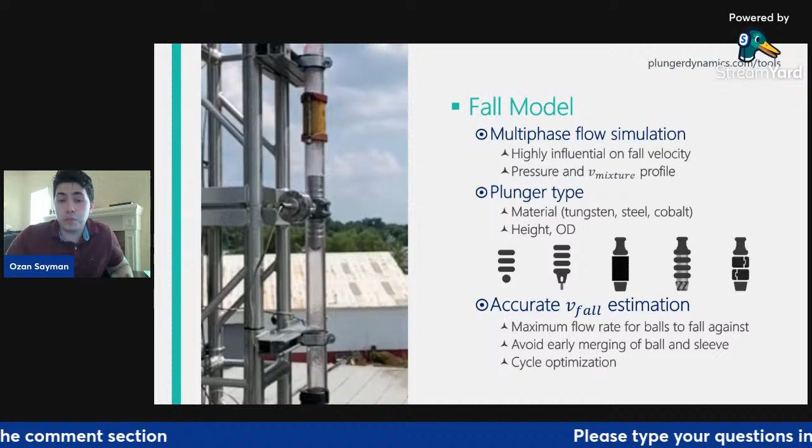So we want to avoid early merging. For that, we typically let the ball fall and have an afterflow time - we hold the sleeve at the lubricator to avoid early merging like this. So we need to be able to calculate how many minutes we need for this afterflow time to avoid early merging. Our fall model is able to do that, and it also helps with cycle optimization for both shut-in and afterflow times.

In the PAGL tool, we are basically doing continuous flow plungers with gas lift. We have the multiphase flow simulation, and with the plunger lift, we are able to get fall and upstroke velocity profiles and the hydrostatic removal estimation. What's important is we are able to optimize the bottom hole location.

When you're designing your well for plunger lift, you also need to design the traveling distance of the plunger, how much deeper you should go, and you can simulate different cases in our tool for different bottom hole locations. You can also simulate for different shut-in times and different afterflow times, basically optimizing the plunger cycle.

We are also offering nodal analysis and gas lift sensitivity capability with our tools. Our key deliverables become optimizing the gas injection, helping the plunger selection, improving production uptime, and also avoiding operational problems.

Talking about operational problems, let's go to some of our field studies. So in this study, the operator reached us and told us they were having a tubing deformation.

So this operator has more than 100 wells with two-piece plungers, and they started to see some wells developing tubing deformation. They tried to understand this problem and theorized there could be other things related to buckling and perhaps water hammering. They tried to solve this problem with different methods, but they weren't able to.

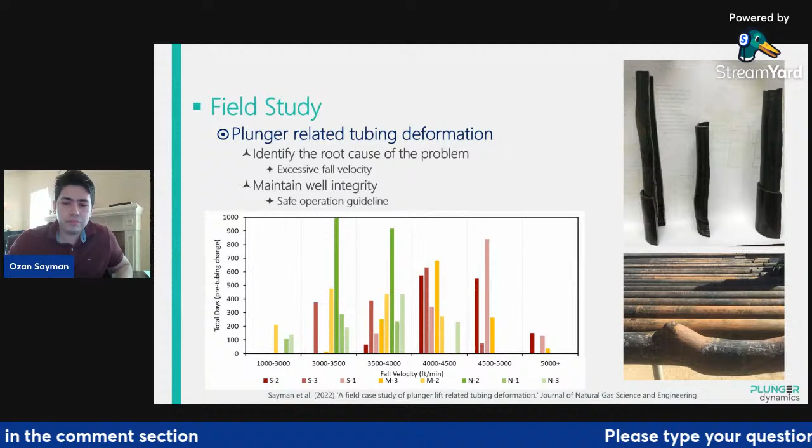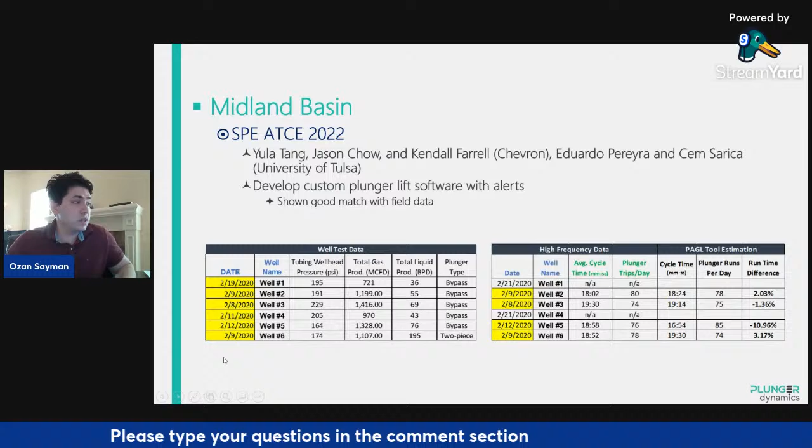What we saw was the field data showed a good match with our tool. You can see their high frequency data, how many cycles they're making, and how many cycles we're predicting - these are basically the runtime differences. We were within an 11% error range for bypass and two-piece plungers, given the production rates from well test data. We're going to present this at the next ATCE.

In the same paper, we're also going to talk about some of our research programs with Chevron. We had bypass plunger testing for different tubing sizes, 2-3/8 and 2-7/8 inch, and we tried different sleeves and different plungers. You can see these are videos from our experimental facilities. We also made a study on internally coated tubing.

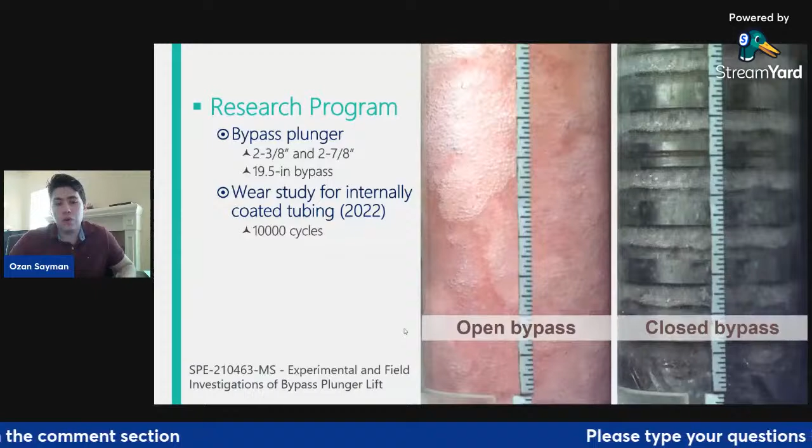So they were asking if the coated tubing is going to be worn out with the plunger lift cycles. So we did 10,000 cycles and got the results of how much wear you should expect due to plungers.

This video is showing us the bypass plunger. Normally, bypass plungers should fall with an open clutch mechanism like this, but in some cases we saw the plungers actually fall with the closed bypass. We were curious if this happens due to hitting the liquid column. But what we saw was, if you don't send the bypass plunger up into the lubricator fast enough, it's not going to open this clutch mechanism with the rod.

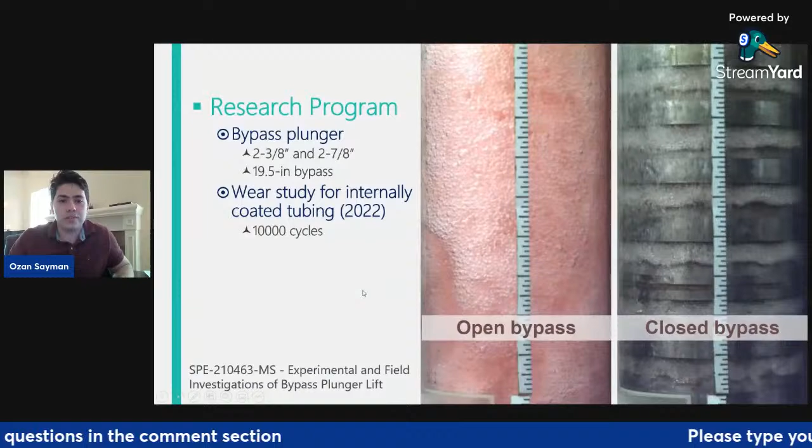So we are also going to discuss all those things in this conference. Thank you for listening to me. If you have any questions, I would like to address them. Thank you for all the videos that University of Tulsa allowed me to use.